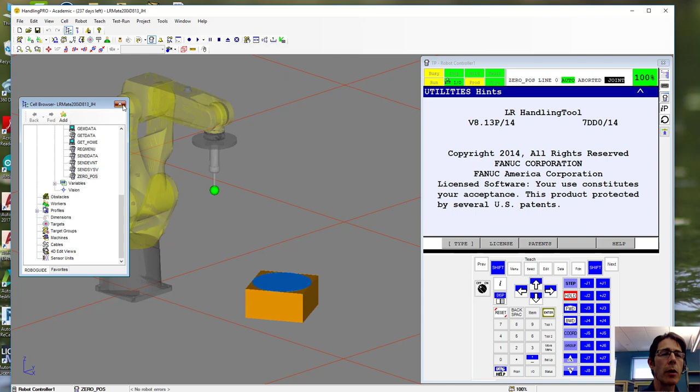Okay, we're getting close here. All right, so here's my work cell. Let's say I want to submit this. I want to make sure my shapes program is working correctly.

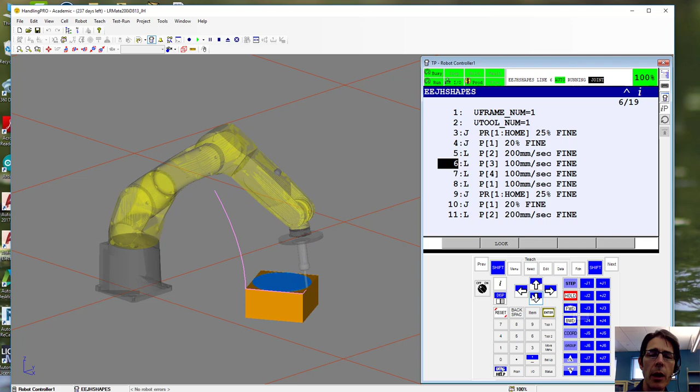Remember, when you go to test a program, always test it using the cycle start button. That's the way to really know if it's working properly or not. If you do it using shift forward, it doesn't always give you the accurate speeds, and it also doesn't show you the trace lines. This is always handy, to be able to see the lines so you know for sure the program is actually tracing the lines you think it is.

Building the program, that's in a separate video. I'm not going to go through any of that.

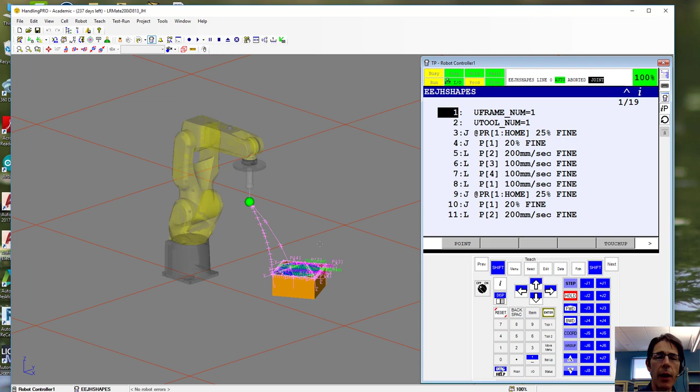Okay, so let's say I'm satisfied. I've got what I need, everything's working. So always make sure you save it up here. In fact, if you try to close it, it'll prompt you to save anyway. So I just always make sure I save it multiple times.

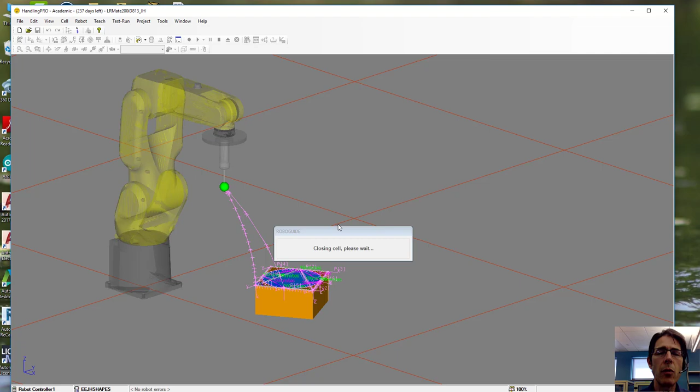Okay, once this closes down, I'll know I've got a work cell. I'm down inside the work cell folder right now, so I just want to go up one level. Here's my work cells folder. I know this is my latest work cell, I've just tested it, so I want to zip it.

And again, the quickest way I've found to zip it—there are multiple methods—but I like to go to, if you're in Windows, send to, compressed zip folder. What it does is automatically put it right next to the folder in the same location, so it's much easier to keep track of. So this is the zipped version of that.

Okay, so now I've got a work cell and a zip version. I know it's the latest one, I've just tested it, so I'm going to submit it on Blackboard.

So if I go up here to course content, I've already logged in, down to assignments, and I'm going to submit under Roboguide Labs 10 to 13. Now I had already previously submitted one, so I'm going to do a start new. This is if you want to make some corrections and resubmit it.

You do that and browse my computer, and it looks like it's already in the folder. But let's say, if it weren't, this is my desktop, and here's that folder I created. So this is why it's good to have it in a separate folder—there's nothing else in there other than what I need, so it's easier to keep track of what's what. So I open and then submit.

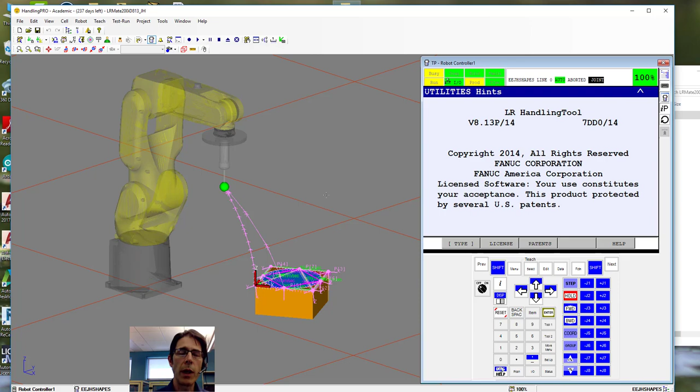Okay, opening up the Workcell. Here's the latest Workcell I just downloaded from Blackboard. I can close this folder up. So here's my Workcells folder, notice I've only got one Workcell in there. It's a good idea to keep just one Workcell, know where it is, and open it from there.

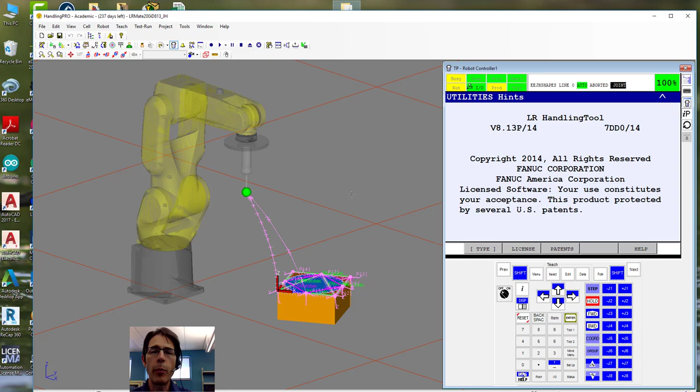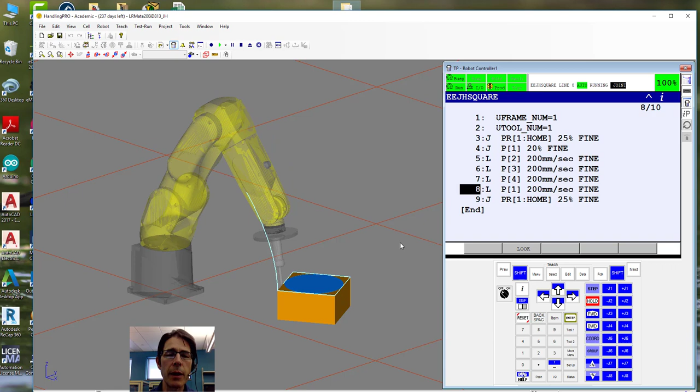Okay, so let's say I do a bunch of work on this. I've already done a bunch of programs like this square program, and I can test that to make sure it works. I've got other videos that go through the process of completing these labs, so I'm not going to do that now. I'm just looking at the whole process of saving and submitting. So I test the program, make sure it works, and I'm going to stop this because I know it's good.

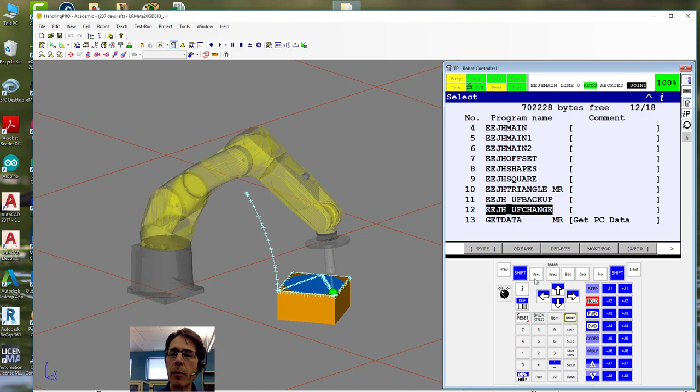Now I'm ready to save it again, so I'm going to make some kind of change here. Let's see, maybe I'll just delete one of these programs, just so I have something different. Okay, I just made a quick change. Now, once again, you've got to save the cell, and close it.

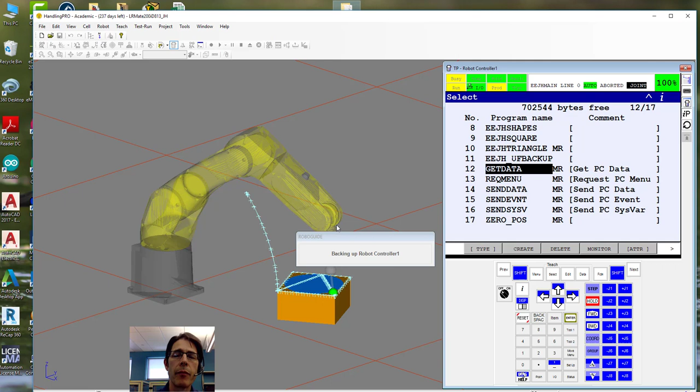Okay, so once again, this is my latest Workcell. I'm going to zip it just with send to compressed folder. Remember, if there's nothing else in there, then you know that once you zip that, the zipped version is the latest one. I know there's been some confusion on zipping a folder and then picking the wrong zip folder, so let me show you one thing that happens — it's a possible pitfall.

Let's say I already have a zip folder and I do a send to compressed. Different zip programs are different, but the one built into Windows creates another zipped version and just puts parentheses 2 after it. I'm assuming if I do it again, it'll probably do a parentheses 3. So notice that if there are previous zipped folders, they stay there, and the latest one shows up with a number next to it, so the largest number is the latest one.

So just keep that in mind, because you can certainly submit that as long as you know it's the latest one. But it's much simpler if you just get rid of any other zipped folders, so you know that the only one there is the correct one.

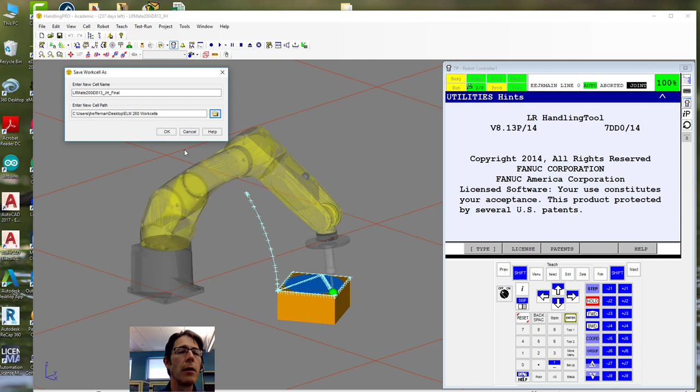Otherwise, if you click this, you can navigate back to your folder that you created, and then that will save it into the same folder. So that's another place where you can run into problems when you're renaming files and it goes and saves it in a different folder than the one it was originally in.

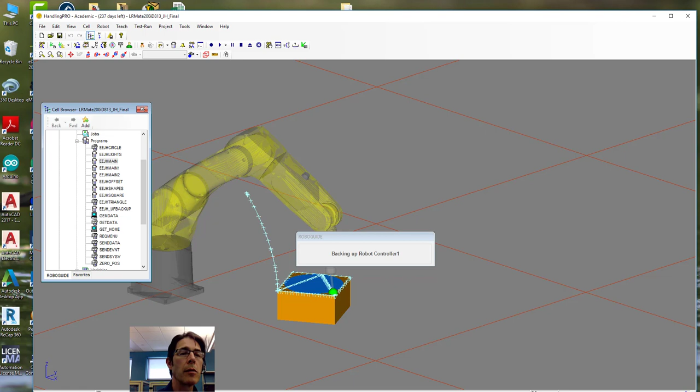Okay, I just skipped over a bunch of the startup process because it takes a long time. So the new workcell under the new name is now opened up. I'm just going to close this and it's going to prompt me to save it again. I always say yes — why not, when saving is better than not saving.

Okay, so now if I go in my work cells folder, you notice here's the original one and here's the one with the new name that I gave it. So anyway, that's one way to change the name of your workcell if you need to do that, but make sure to pay attention to where it ends up saving when you do the save as. Okay, I hope that all helps clear things up, and good luck with submitting.